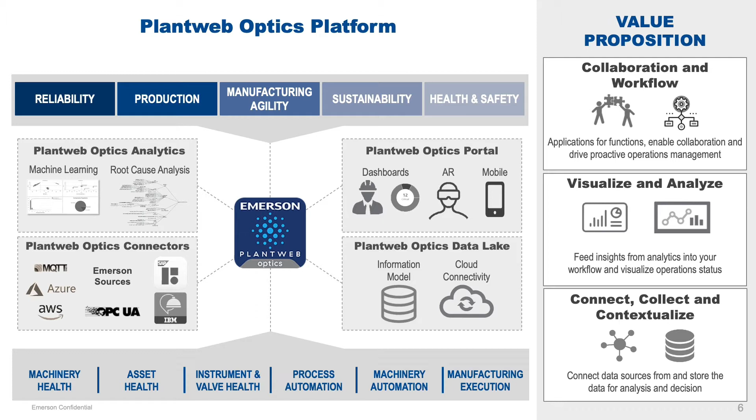So part of that value proposition is really connecting, collecting, contextualizing data in our data lake, visualizing and analyzing that data, and really driving collaboration and workflow. So as part of this, we have a variety of different pieces of software, including data lake, portal, our connectors. So our connectors connect to Emerson sources and some open source standards. And then Plantweb Optics Analytics here, which really provides that advanced analytics capability, including machine learning and root cause analysis.

And as part of that software, Plantweb Optics Analytics, we did win an award here, the 2021 IoT Breakthrough Award as the Analytics Platform of the Year. So here we were recognized for really helping our customers improve key performance areas like reliability, safety, production optimization, and energy management. So really proud of getting that award out of all of the nominations worldwide.

And these are the main components of Plantweb Optics Analytics. There are two main pieces of software, Modeling Studio and Project Studio. Modeling Studio is really about taking raw data and turning that into predictive models. So that can be cleaning, exploring, running advanced analytics like clustering, classification, and finding more about your processes and your data that way.

Then we have a few key modules within our Project Studio. One is our rules and complex events. That's really about detection of events in your software, and that's about setting logic in place to recognize things like, for example, column flooding.

And then root cause analysis works in tandem with that. So that's really about putting together fault trees and automating root cause analysis to find the root cause of these events. So an event happens like column flooding, being able to figure out what event precipitated that is causing that flooding.

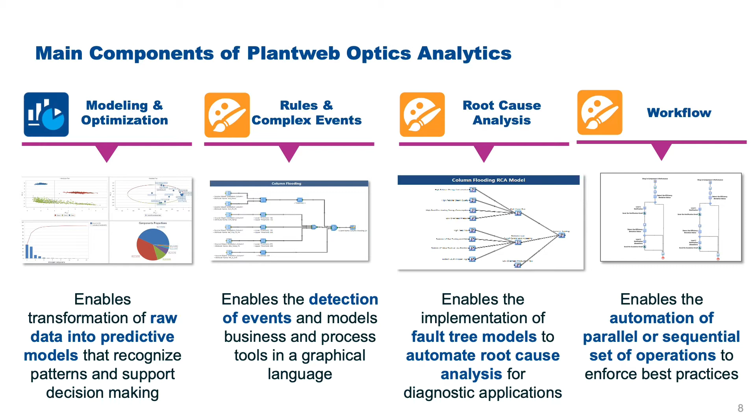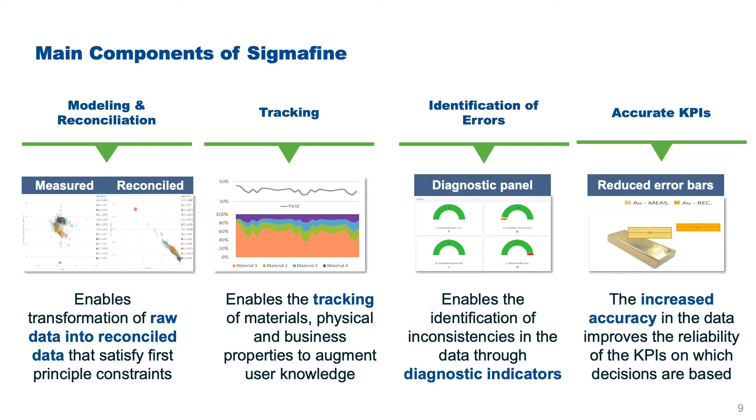And then we see here the main components of Sigmafine. So things like modeling and reconciliation, tracking, identifying errors, and making sure that your KPIs are accurate. So with those two things together, what we wanted to do was combine those and see how they were greater as a whole rather than the sum of their parts. And these are what each of these bring to the table.

So in Optics Analytics, we have things like KPIs for your assets and processes, root cause analysis and workflow. And Sigmafine really brings that data validation and some capabilities like mass and energy balance in. And combined, Optics Analytics and Sigmafine really provide an analytical platform that can drive action based on reliable data.

As we know, data is necessary for analytics, and more so than that, reliable, good data is a part of that as well. So as we were working with Sigmafine, we came up with the idea to run a test of combining our two softwares. And this is a furnace case study around that. Fida will walk you through what we did in this case study, and hopefully you can get some ideas about how you could do something similar in your processes.

Thanks, Michael. In this part, I will go through a use case example around the furnace. In analytics, we use templates and models to supervise and manage the performance of critical assets. In this use case, we worked on a fired heater. We made a model for it, which embeds years of expertise and process knowledge to preemptively alert operators about possible problems and prevent costly shutdowns.

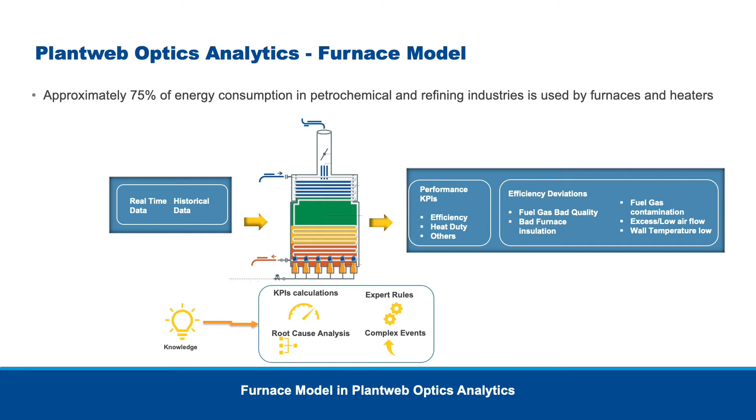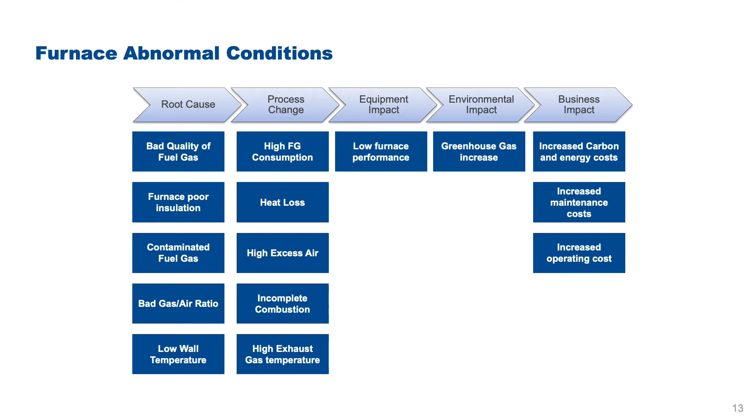This model embedded performance calculations too, to identify performance targets and recurrent problems, and root cause analysis to help find and mitigate the impact of deviations. As part of the model, we identified root causes for abnormal asset behavior. Also, we identified their impact on the equipment, environment, and business. The detection of the abnormal behavior is mainly based on the raw data.

There are some challenges with the raw data that could be divided into two categories. The first one is with the measurement error. The measured data may be lost, contaminated by gross error, or disturbed by random signals during the measurement process. So the final data displayed to the end user might deviate from the original data, which might affect the decision making.

The second challenge is the lack of data. Sometimes we don't have enough instruments to generate the right KPI in the model, which might be caused by missing instruments in the field, and that needs to be compensated by estimation or process modeling. These two challenges may lead to wrong decisions.

The solution is to generate trustable data for the analysis through data reconciliation. This will bring considerable benefits like data correction, easier detection of measurement problems, and effective decisions. We partnered with Sigmafine because it increases confidence in what we measure and estimates what we don't measure, which helps us to make better business decisions.

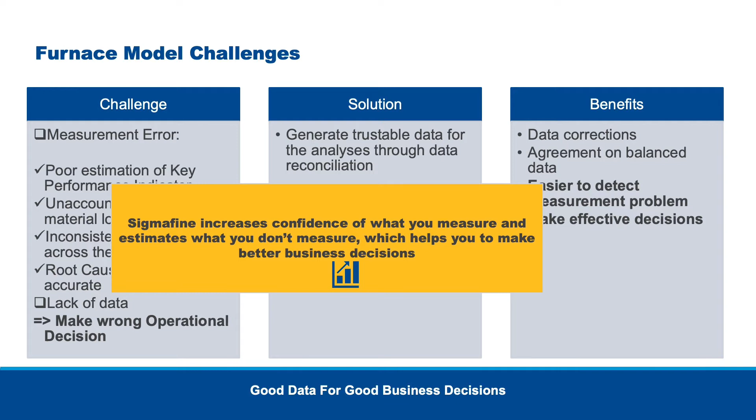This is what we get when we integrate Sigmafine with our model. Now, the raw data is flowing through Sigmafine and then fed into the Optics Analytics model, which will deliver enhanced results, enabling the user to identify deviation from optimal mass balance, identify the cause of underperformance, and work toward corrective actions.

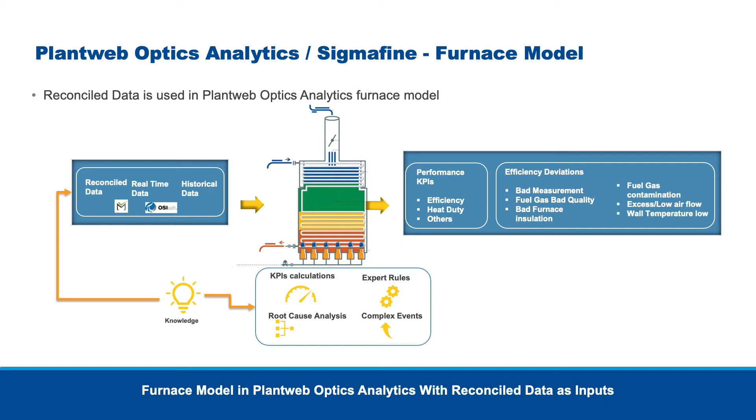So to start building the combined solution, we follow these steps. The first one is to create the model in Sigmafine. We start by building the furnace model, reconcile the data, and then estimate unmeasured parameters. Sigmafine uses the data reconciliation method, which uses a least squares formulation to quantify the error in the model measurements. Here we developed the furnace model in Sigmafine, which is empowered by a thermodynamics extension to do the hourly integrated mass and energy balance of the furnace.

Basically, we are reading the raw data from the PI Data Archive. The data were structured in operational assets with PI Asset Framework. After that, these assets are related together in a model and reconciled with Sigmafine server.

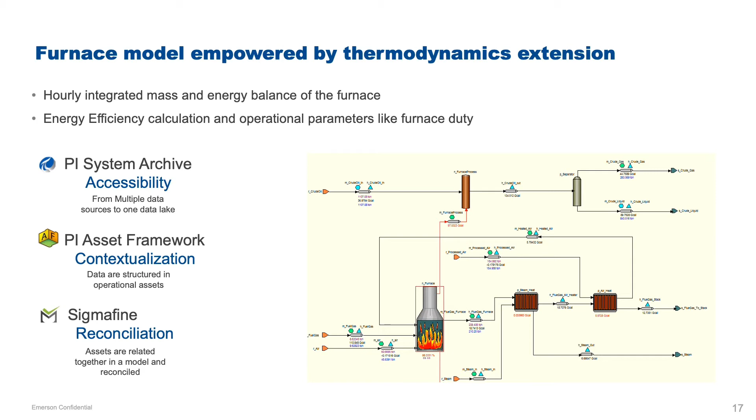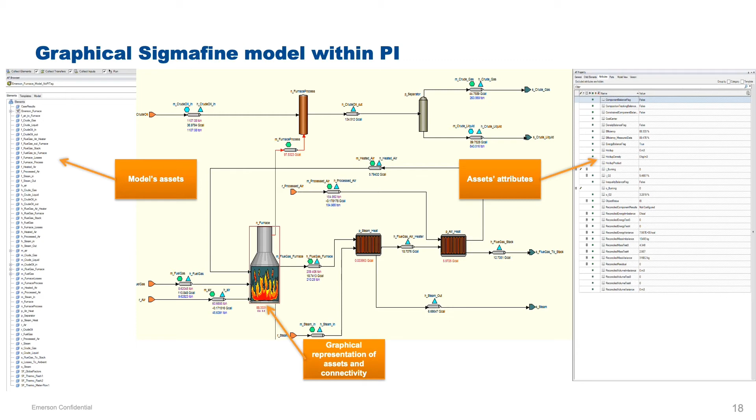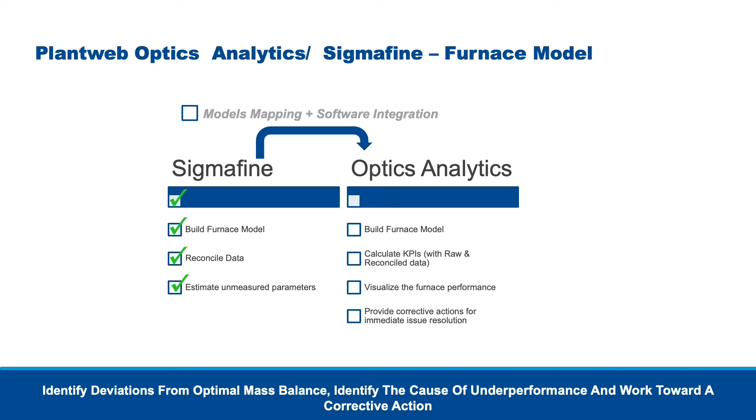So this is the Sigmafine furnace model. Each asset is represented by a standard Sigmafine template, which is represented in a modular display. Now we will do the data mapping and integration between Sigmafine and Optics Analytics.

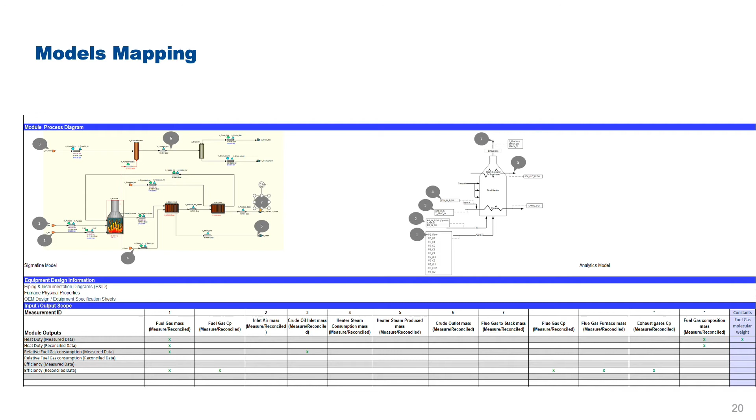Once we have generated the reconciled data, we identified the data we need from Sigmafine in the analytics model, and we mapped these data to the KPIs that we need to generate in analytics. Then, in order to integrate the two components, Sigmafine generated the reconciled data and published it to the Pi server. Then analytics connects to the Pi server and reads the reconciled data from there to generate KPIs.

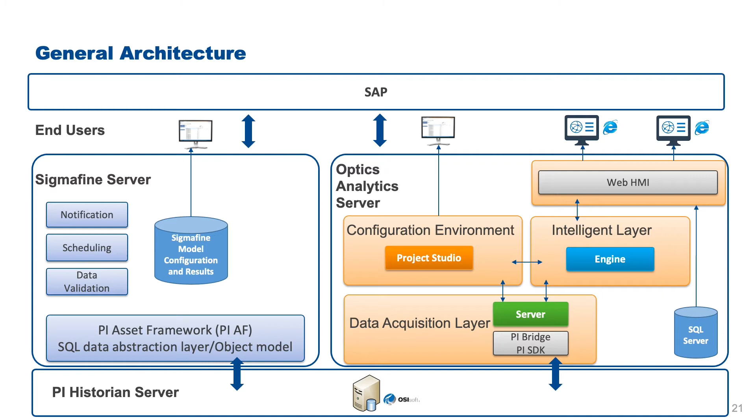The combined model is fed by real-time infrastructure with process data and, where required, with laboratory data. It provides seamless integration with the customer infrastructure, able to interface with disparate data sources and data repositories, such as historian, ERPs, and business intelligence tools.

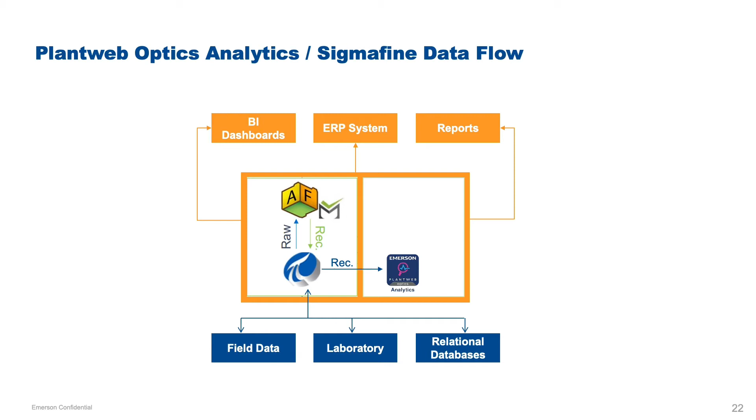So Sigmafine can either publish the reconciled data to SQL Server or Pi Data Archive server. The connection from analytics to the SQL Server is very easy and simple. For the connection to the Pi server, we need to install and configure PI Bridge to connect to Pi server. Once connected, the Pi variables will be transferred to analytics as global variables. Now we will create the model in analytics.

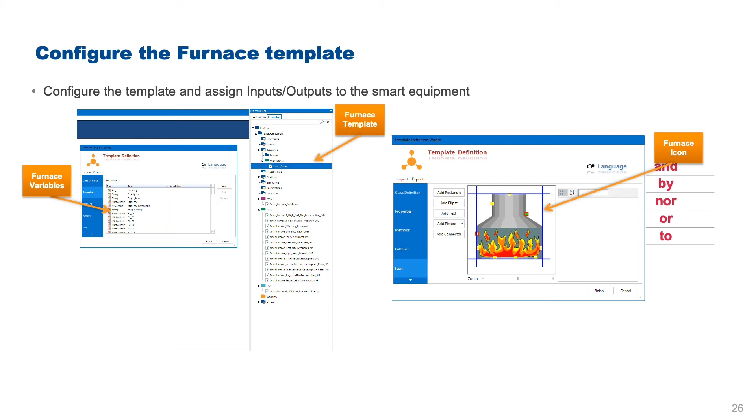We started by adding a class. This class will embed calculations to calculate the asset performance. This template determines KPIs and metrics. Then it compares the calculation to a baseline or design values to determine deviations in order to identify potential instrument problems, pinpoint degradation source, and evaluate the effectiveness of cost improvement actions.

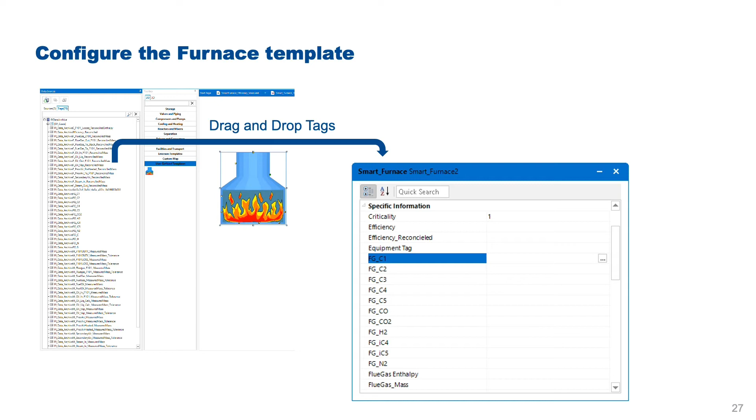The asset includes a set of properties where each property is assigned to a tag from Sigmafine for the reconciled data or from Pi for the raw data. Now we will go to the KPIs development. We use the custom K rules to compute KPIs like efficiency and heat duty. As you can see, this model uses a graphical environment based on drag, drop, and connect.

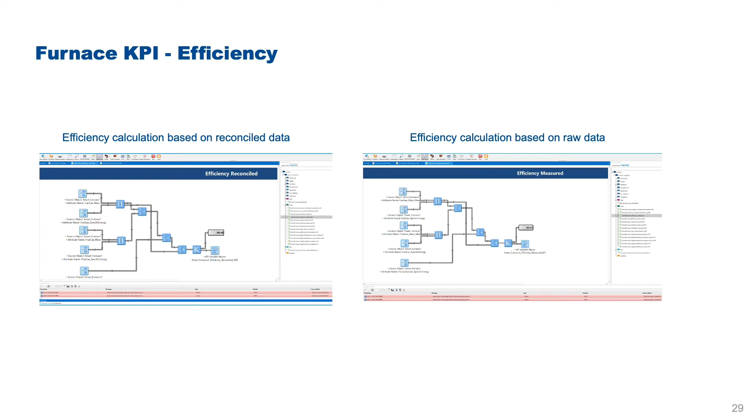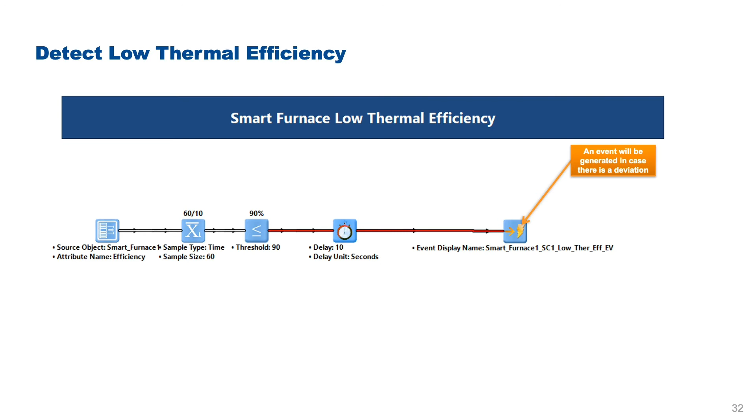After generating KPIs, we compared the calculation to a baseline or design to determine deviations and generate events accordingly. So the event here is generated when a low thermal efficiency is detected. Then we build a complex event graphical rule to determine the root cause of the deviation.

We used the RCA model in Analytics, which allows creating fault propagation models that are defined by the cause and effect relationship. The possible causes of an abnormal condition are located upstream, and the effects are located downstream. For example, we detected a low thermal efficiency. The cause of this symptom is the instrument bad measurement.

And behind this problem box, there is a logic that we define to trigger this problem when it occurs, like we saw previously. So this model also provides actionable knowledge for immediate resolution of performance gaps. These actions were associated with the problem box and displayed in dashboards. For example, a message will be displayed to check the instrument FIT 101.

Moreover, using Sigmafine data, we can determine which instrument is causing the issue and which measurements are contributing most to the imbalance. In this way, the root cause analysis based on reconciled data can serve several purposes. First, it acts as an early warning system for instrument malfunctioning or drifting out of calibration. And second, it acts as an online validation process where the performance of individual instruments can be compared for consistency against the rest of the measurements in the system.

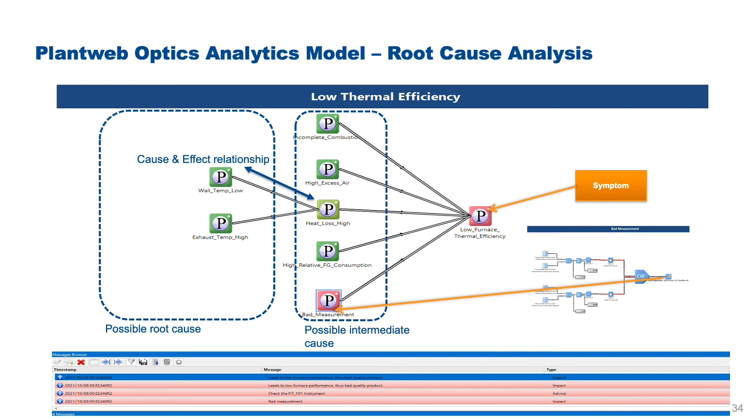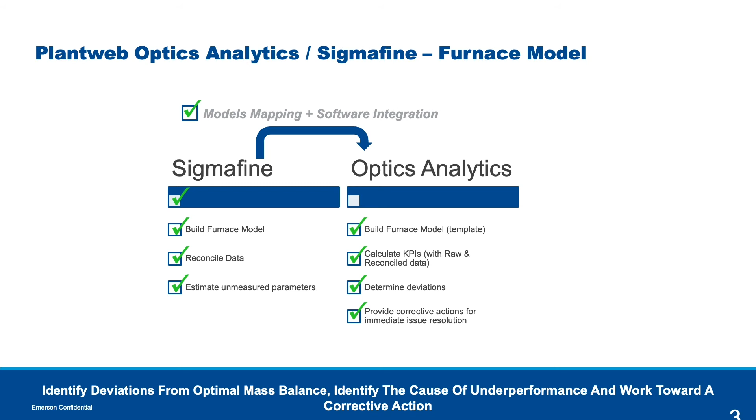We can have more details about the low furnace performance by going into this icon. The low furnace efficiency symptom is associated with the bad measurement provided by instrument FIT 101. So this is the summary overview with drill down capabilities. We were able to estimate the unmeasured data like flue gas to stack and the vaporized crude.

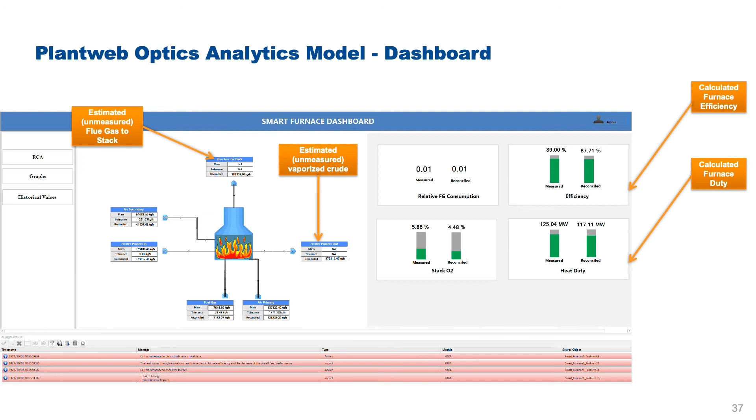And then we were able to calculate the KPIs based on raw data and reconciled data. Then with the root cause analysis based on reconciled values, we identified which instrument has a potential problem and generated actions for immediate resolution of performance gaps.

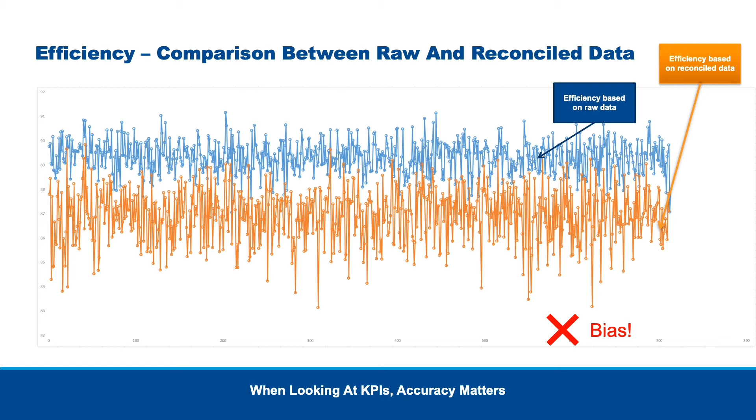This graph is a comparison between thermal efficiency calculations based on raw and reconciled data. As you can see, the efficiency is lower than expected. This bias between the performance indicators with reconciled and raw data is caused by bad measurements.

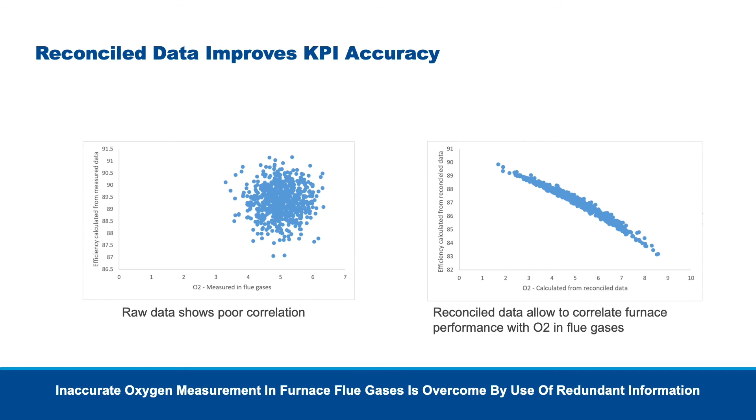The raw data set you can see on the left is used to study the correlation between the measured oxygen in the flue gases and the furnace efficiency. As you can see, the raw data set shows a very poor correlation because of the inaccuracy of the measured data. So we used Sigmafine to perform a data conditioning step based on the mass and energy conservation principle, resulting in reducing the inaccuracy of the oxygen measured and making the resultant dataset suitable for use by the Optics Analytics model. So the expected correlation appears.

The use of the reconciled data, which are free of gross error and which satisfy all plant material and energy balance, enhance dramatically the accuracy of process model used for optimization, since larger gross error can nullify gains achievable through process optimization.

So this is the impact of lowering target oxygen in the flue gas by 1% through analysis of reconciled data vs unreconciled data, which would result in improved efficiency of the furnace and an energy saving worth between 100 and 200K per year, depending on the natural gas cost. Lowering the target oxygen in the flue gas by 1% will also lower nitrogen oxide emissions by 10 to 15%, allowing the refinery to more easily reach emissions target or allowance.

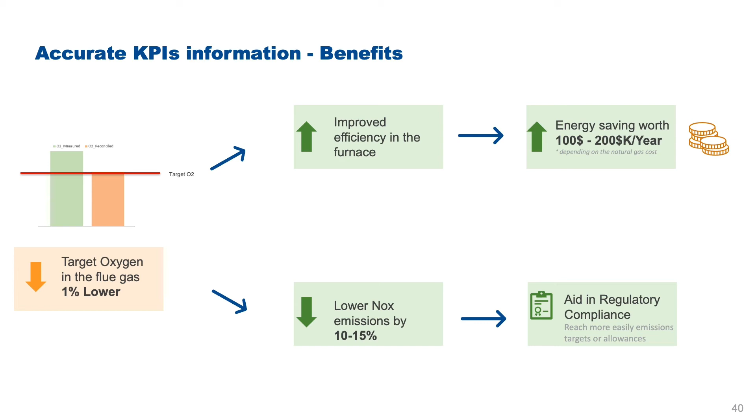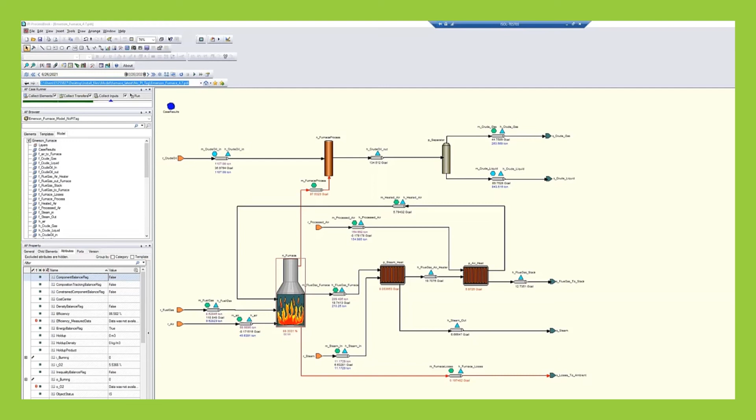Let's go now to the demo, and let's start with the furnace model in Sigmafine. The best way to visualize this model is to use the modeler or the Sigmafine modeler add-in to ProcessBook. As you can see, each asset is associated with an element template, and assets are related together in the model and reconciled. The reconciled data is then archived in the PI server. This is the PI System Management Tool that we can use to visualize the current value in the PI Data Archive of the reconciled data from Sigmafine. This data will feed then our analytics model.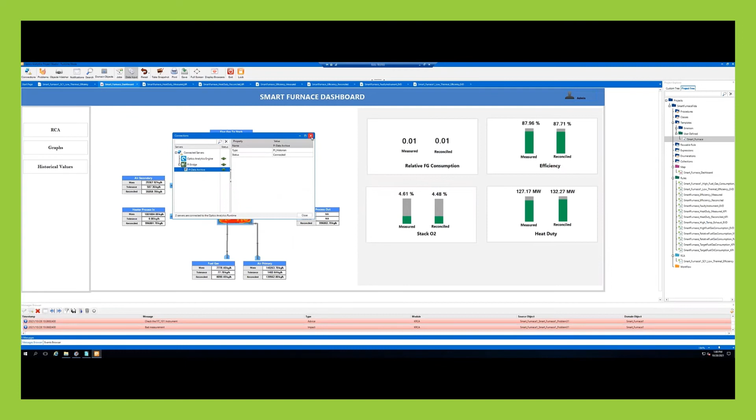This is the Optics Analytics project on runtime mode. We can check the connection status with the data sources, in that case with the PI Data Archive through the PI bridge. From the object watcher, we can check the variable status and values in the system. This asset is a user-defined template, which has properties, and each property is associated with a variable that we are reading from the PI server.

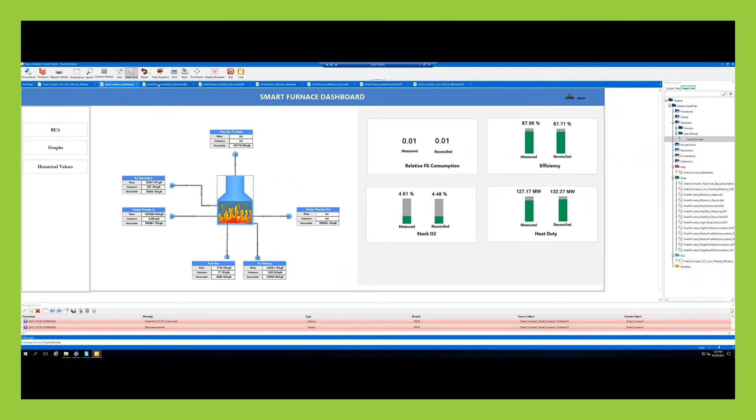After defining the model properties, we calculate the KPIs like the efficiency and the heat duty. We used for that the K rules, which has a rich toolbox including arithmetic, statistic, temporal reasoning, and logic blocks that can be combined all in one rule. For example, this block is used to read the fuel gas flow from the furnace model. And this one is used to do an arithmetic operation.

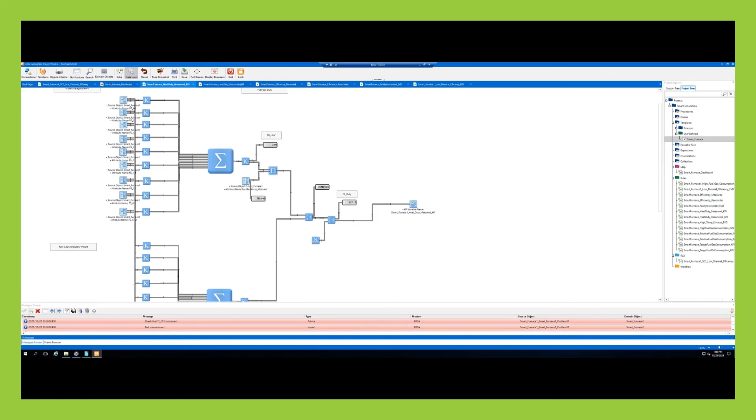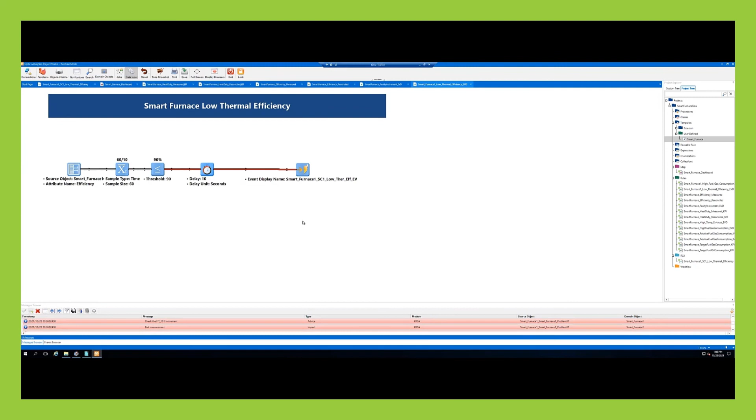After calculating the KPI like the efficiency, we compare its value to baseline or design value to determine deviation and generate events accordingly. So let's take this example. Whenever there is a low thermal efficiency, an event will be generated. To summarize now, the K-rules model was used to calculate KPIs like the efficiency and trigger events if any deviation are detected. In the same way, we have developed other logic to detect a bad measurement in the process based on the reconciled data, which might affect the thermal efficiency values.

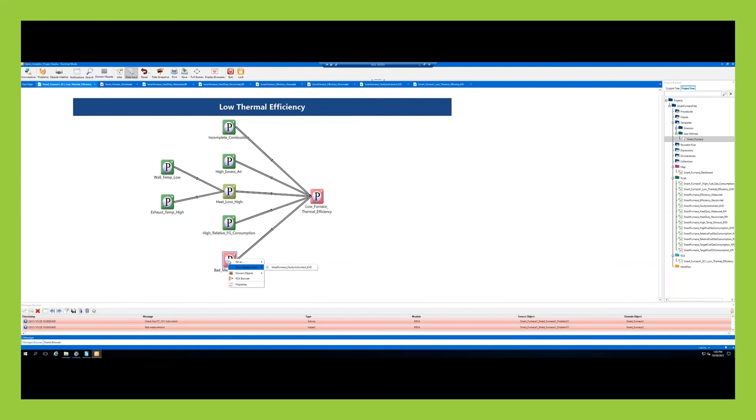So whenever there is an issue in the measurement, an event will be triggered and communicated to the KRCA trees in which root causes are identified. So each one of these problem blocks is associated with an event. We can show here the related events to the bad measurement, for example. To have more details about the problem, we can go to this icon and click on Show Tree View. So as you can see, the low furnace thermal efficiency is caused by bad measurement in the instrument FIT 101. Actions associated with the problem can be shown in the message browser as well.

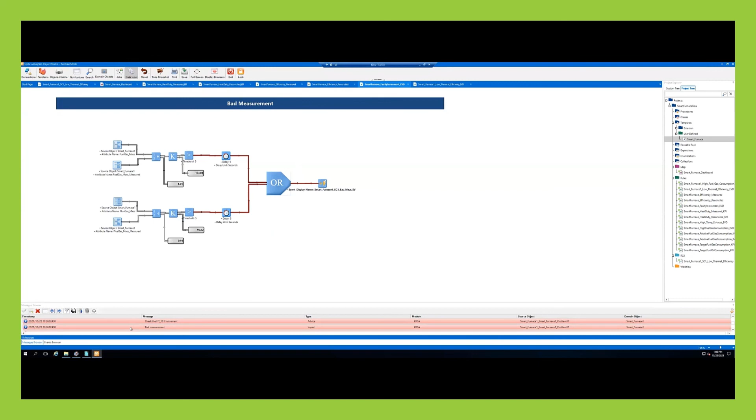That was the demo for the combined solution. Back to you, Michael. All right. Thank you so much, Vida.

So as you see, there is some definite value and also some ease of use in combining Optics Analytics and Sigmafine. We showed just one use case, but these are really the main use cases that you get from combining these two technologies of analytics and something like Sigmafine. So really just knowing that you have trusted data. Here you have the plant data. We take in information in our server, but that layer in between really can do things like data conditioning. It opens up a world of new use cases like custody transfer or reporting.

And really looking to take what you've learned from analytics and drive action. So being able to have a visualization and a dashboard that quickly shows what you can see from a reconciled perspective versus a non-reconciled perspective, having root cause analysis, actionable advice that can really take your learnings and make sure that operations can do something about it. And here, what we're super interested in is how to improve sustainability, leveraging something like Sigmafine to really optimize processes, reduce energy emissions, and eliminate losses as we all look to become more sustainable.